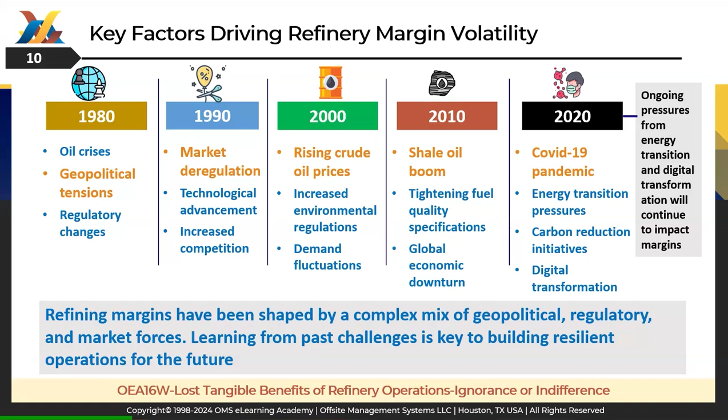So what can we do to improve profitability amid margin volatility? Refineries can focus on operational efficiency—they can leverage advanced control systems to optimize production, implement predictive maintenance to reduce downtime and equipment failure, and focus on energy efficiency improvements to lower operating costs.

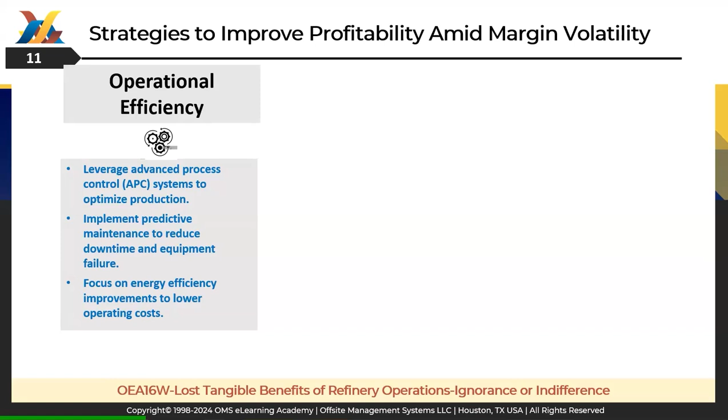Second, refineries can pursue digital transformation and AI. We're seeing a lot of these initiatives in the industry—not just refining but all industries—utilizing AI and machine learning models for real-time data analytics and decision making, adopting digital twins for process optimization and forecasting, and implementing data-driven optimization in blending operations. I'll touch on some of these AI and machine learning ideas in this webinar.

Then we have initiatives for net zero and carbon reduction. We hear much about the Paris Agreement and other things. Refineries down the road have to meet these carbon reduction initiatives to satisfy new regulatory demands, and optimize fuel quality specifications to meet environmental standards, and focus on energy transition to adapt to future market shifts. These are the 3 areas—some is being done now, and some can be done in the coming decade. Implementing this strategy can help refineries convert gross margin into sustainable net profit, even in volatile markets.

So what are the two areas of the refinery that are really impacted by this? We all know on-site operations—that's where all the process units create and manufacture components and products. These products aren't sold by themselves; we're talking about things like the distillation column, FCC, isomerization units, and so on. But they create components which go to the off-site operation to create the final product, like fuel, gasoline, diesel, fuel oil, LPG—those are the products sold in the market.

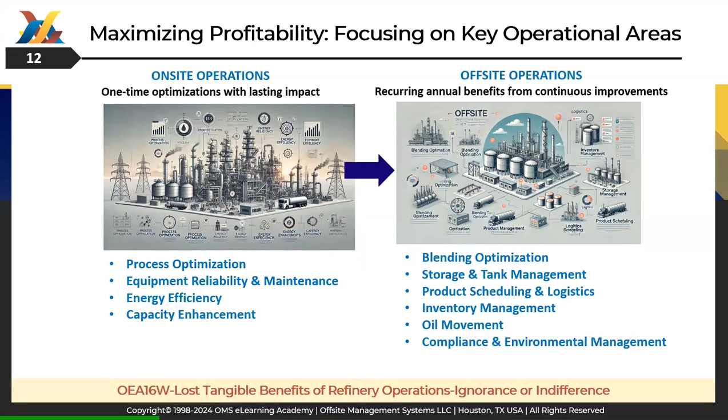And that's where the refinery makes money or loses money. Those areas include blending optimization, storage and tank management, product scheduling, logistics, inventory management, oil movement, and compliance and environmental management. Unfortunately, the off-site area is ignored by many refineries because it's not considered very important—they focus more on on-site. We'll discuss more on this topic, on where the money really lies.

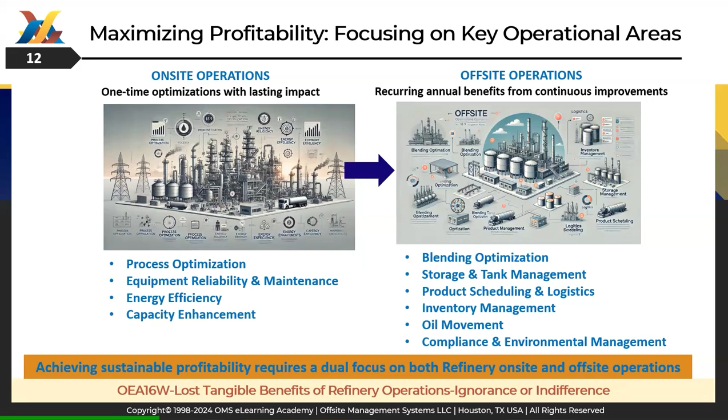So achieving sustainable profitability requires a dual focus on both refinery on-site and off-site operations. There's a belief that we can make more money on on-site operations than off-site. Let's wait a couple of slides on that one. So where does refinery profit really come from?

Let's understand the lost reasons for lost benefits in refinery operation. We have 5 factors: data and measurement inaccuracies at 10%, scheduling and operational delays, equipment failure - but these are not due to any ignorance factor. Ignorance factor, which is lack of awareness and training, is 30%, and indifference, resistance to change, is 25%.

To address this, refineries need to invest in training to reduce loss, because unless employees and professionals are trained, they cannot be skilled or aware of what they're losing for the refinery. Then indifference comes from the culture of continuous improvement, and this focuses more on management, who have to recognize and accept changes. We'll go into more detail in this slide.

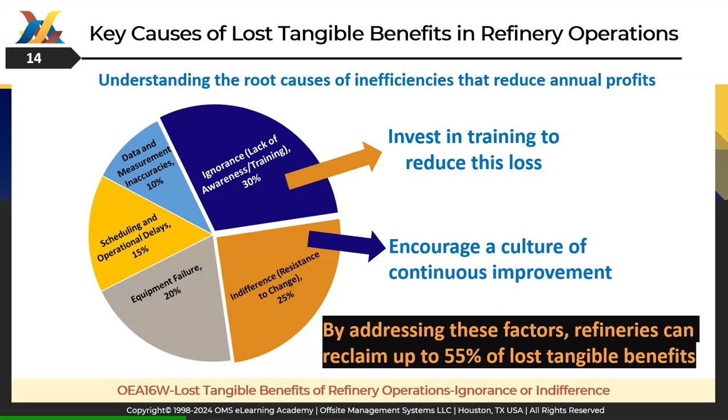People ask me, what is the ignorance factor in operations? Ignorance factor is lack of awareness and having outdated knowledge - these are the two major reasons. Failure to recognize impact, culture, complacency, limited exposure, absence of data-driven approaches are also important but have less impact.

The reasons for this: outdated training and skill development, organizational silos - there are too many departments which never talk to each other, they don't know what the left hand is doing with the right hand. Resistance to change - I hear again and again, 'if it's not broken, don't fix it.' Lack of management focus on off-site operations, lack of access to modern technologies, inadequate data analysis capabilities, and evolving industry standards and compliance regulations.

On this point, I had presented a paper in Delhi on 9th September, with about 600 people from the industry. My interaction with them was the same thing: why are refineries ignoring the benefits and why are they indifferent? They had some insight and some reasons, and those reasons are put together in this webinar to give you first-hand information on why this happens.

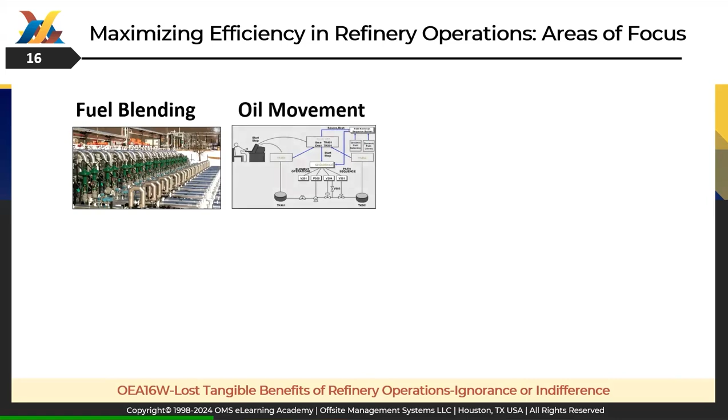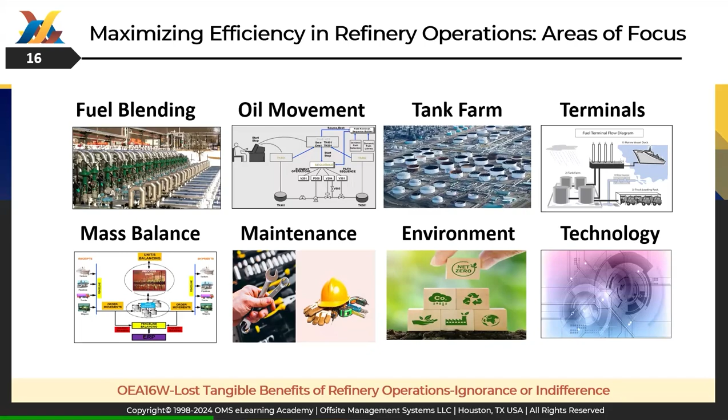So what are the areas of focus for increasing efficiency in refinery operations? We start with fuel blending, which everybody knows brings about 50 to 55% of the products in the end. Then oil movement, tank farm, terminals, mass balance - sometimes called oil loss - maintenance cost, environment, and technology. All of these 8 areas have their own importance in terms of how much money they bring to the table as tangible benefit, and we'll go into detail one by one. Let's start with fuel blending.

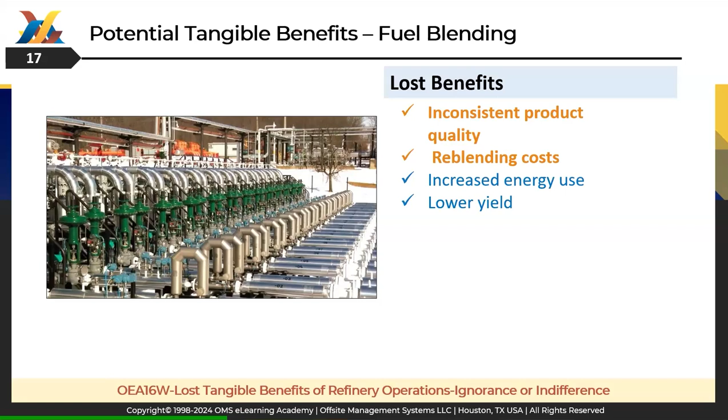I've talked about this concept over many webinars, but we'll keep it short here. What are we losing here? We're losing benefits in terms of product quality and reblending cost, increased energy use and lower yield. Inefficiency in terms of manual suboptimal recipes, inaccurate blending ratios, and outdated blending technology. The benefit is about $22 to $24 million, say $20 to $25 million per year.

Now, all these numbers I'm showing you on these slides, and in future slides, are not fake numbers. They have really been proven in the industry from OMS experience and from your own experience too.

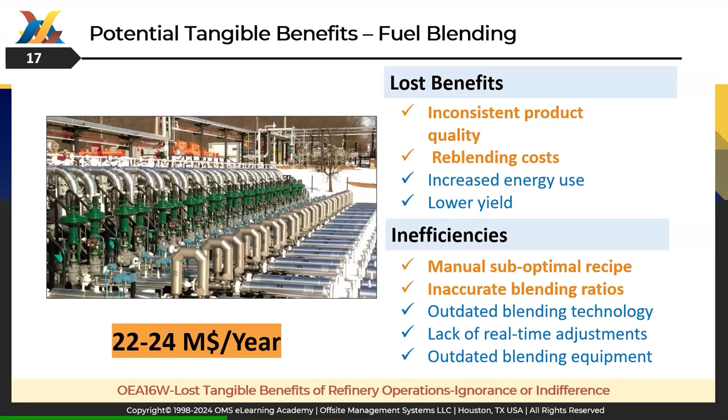Let's go to the next area, oil movement. In terms of oil movement, we are losing benefit in terms of product contamination and higher operational costs, inefficient infrastructure, and excessive energy consumption.

If you look at oil movement, there are lots of movements occurring every day - from tank to tank, tank to ship, ship to tank, whatever. It's about 12 to 13 types of different movements, and tank to tank is the highest number of transfers in a refinery. So for a 300,000 barrels per day refinery, about 100 to 200 movements take place in a day. Some are manual and some are automated in a modern refinery.

So there's a lot of inefficient routing and scheduling, underutilization of tank capacity because of fear of spills, and contamination from product mixing. When these products are contaminated, they go to slop - it's about $3 to $10 million per year. I need to point out that a lot of refineries take the blending upgrades and the oil movement upgrades separately.

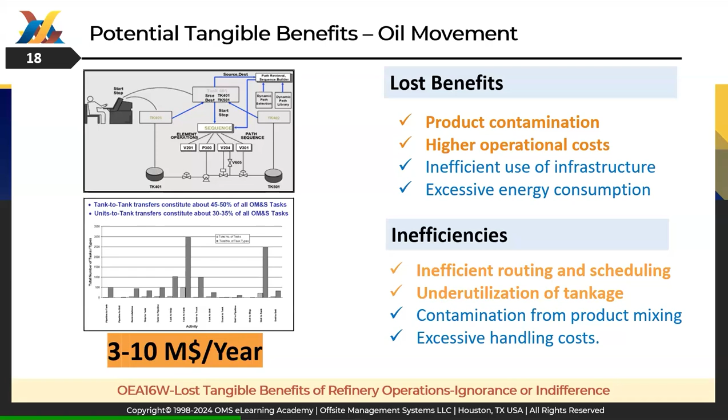OMS has done many studies of oil movement, and at the end of the day, we find that oil movement does not have enough incentive, even at $3 to $10 million, because it's done separately. The refineries which execute blending and oil movement together achieve the maximum ROI. But that concept is lost, and they don't realize it. They cut corners by doing blending first and then oil movement, and they lose the ROI for oil movement.

Let's go to tank farm management. Now we lose the benefits in terms of increased energy costs, product degradation, higher emission, and safety risk. Emission comes only when you are loading the tanks, and the vapor at the top of the tank liquid is lost to the atmosphere, and there are regulations on how much you can do. So they have to control that and minimize the loading and unloading. There's inefficiency from spills during loading time. If it's not automated, it spills, and then it causes a lot of difficulties in cleaning up.

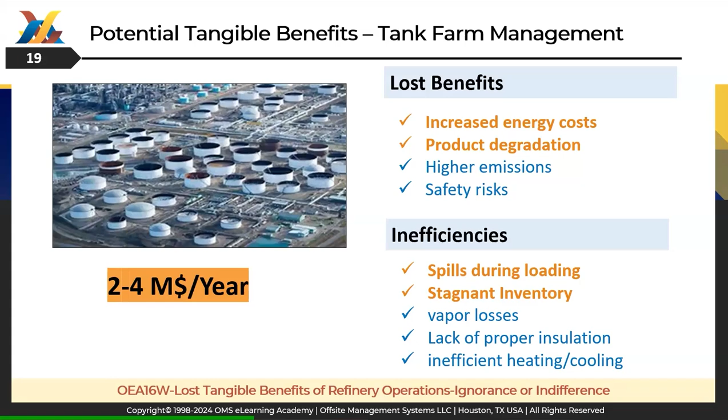Now, stagnant inventory - inventory is a liquid asset, about $3 billion staying in the tanks. It's like money in your bank. If you don't move it, you don't get much interest. So you have to move it, invest it somewhere else. That's exactly the same concept in a refinery. If you don't move the inventory either to customers or into a product, then you're really losing money. Every day you hold it in the tank, you're losing money - about $2 to $4 million per year - in terms of vapor losses, lack of proper insulation, and inefficient heating and cooling.

Let's go to terminal operation. Terminal operations are like ship, truck, barges, and other things. If the ship is delayed and waiting at the port, they have to pay demurrage charges, and the ship gets delayed because it might have to go to another customer. So there are also lost opportunities - if you don't sell product to the customer, you're losing opportunity in time, plus compliance fees and fines.

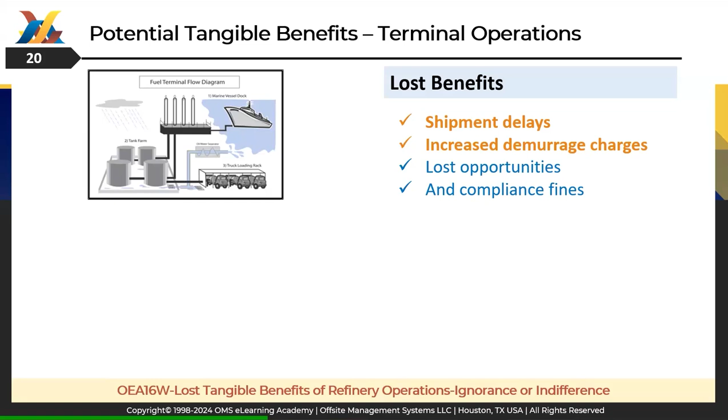In terms of inefficiency, poor scheduling - if the ships are not scheduled properly based on what is in the tank or what is required, then you pay demurrage charges. Inaccurate product measurement, which is called custody transfer - if you don't have the right meter calibrated or installed, it causes a legal dispute, because somebody says I gave you so much, and the refinery says no, I did not receive that much, because the meters were faulty. It can lose anywhere between $1 to $3 million per year.

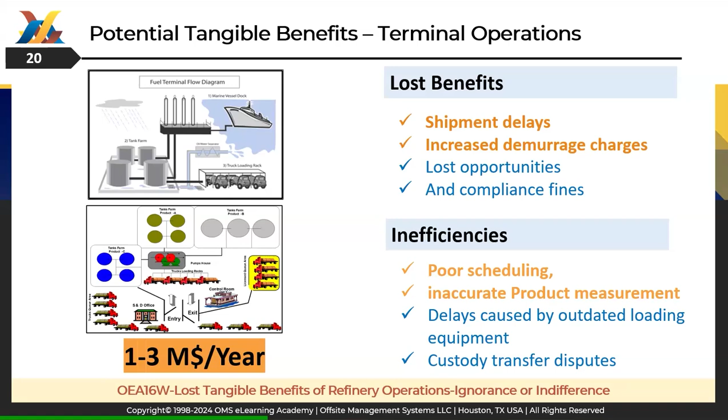Let's go to mass reconciliation now, which is also called oil loss. Oil loss is measured from inlet to outlet - it means what you received at the inlet side in terms of crude and product, and what products you are manufacturing and selling to the customer. I have seen many refineries do this balance. This balance is done by mass balance, which is called mass reconciliation, because products are not lost between input and output - they have to be conserved.

Now, I've seen data from refineries showing a negative loss. It means the mass is gained, which is not correct. And it's not correct because of data reconciliation issues. So it's an inefficiency due to manual data entry errors with delays in reconciliation. They don't do it every day - they do it every month, because a lot of work is involved. Many companies have tried creating million-dollar projects where they want to do it every day, and they failed. Unfortunately, I was part of those kinds of projects.

So I've shown here the lower graph that if we take a 0.01% improvement in oil loss - the typical average oil loss is about 0.4 to 0.5%, which is a good average - if you decrease from 0.5 to 0.49, you gain millions of dollars in terms of oil loss.

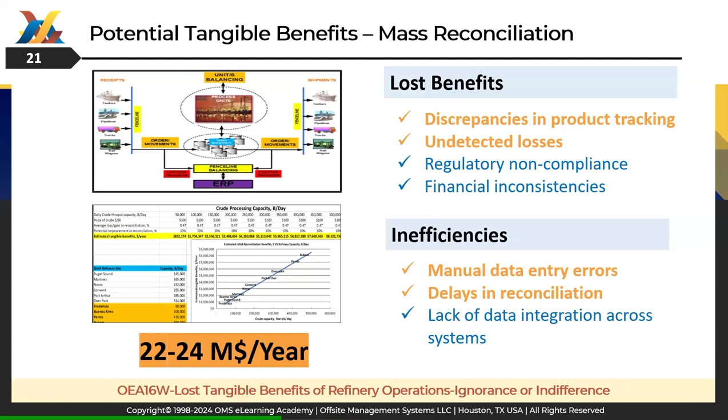We go next to maintenance and equipment health. Equipment has to be maintained properly. I've seen the failure of pumps and valves in the blending, and then everything stops and the products are not dispatched to the customer. So you have reduced equipment lifespan, unplanned downtime, and higher operation cost.

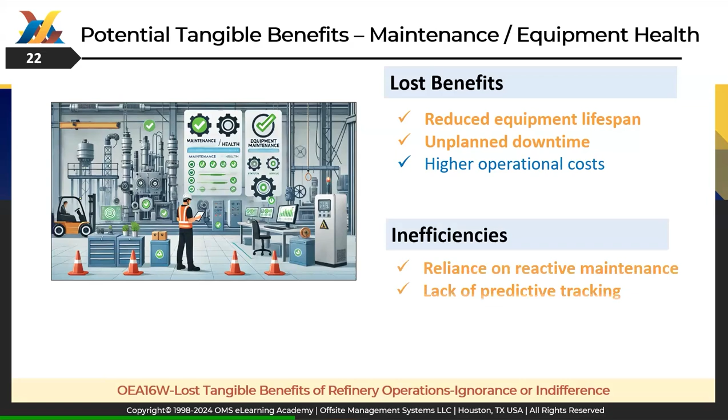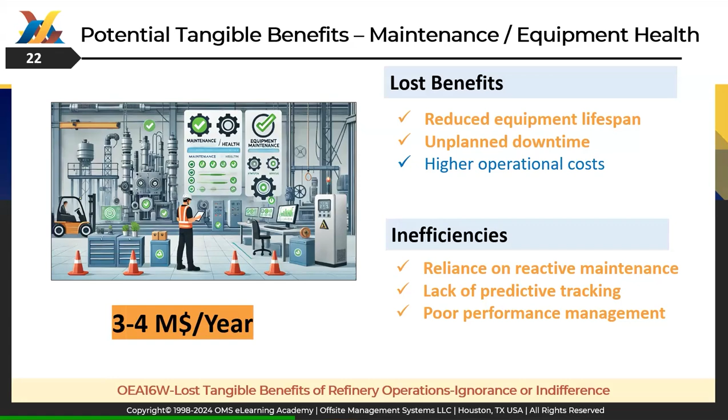Inefficiency, you're relying on reactive maintenance. You fix it only when it's broken. But if you don't do preventive maintenance, then you're asking for disaster, and you're losing opportunity. It's about $3 to $4 million per year.

Then we go to environmental compliance, which is becoming a big thing nowadays because of zero nets and carbon reduction initiatives. We've seen so many agreements now, and the loss comes in terms of fines, because if you are emitting a lot of hydrocarbons, you will be fined. So refineries are losing money from that point of view, and it also damages the reputation of the refinery. Inefficiency, inadequate emission control, lack of real-time monitoring, inconsistent adherence to regulatory standards — it's about $1 to $8 million per year estimate.

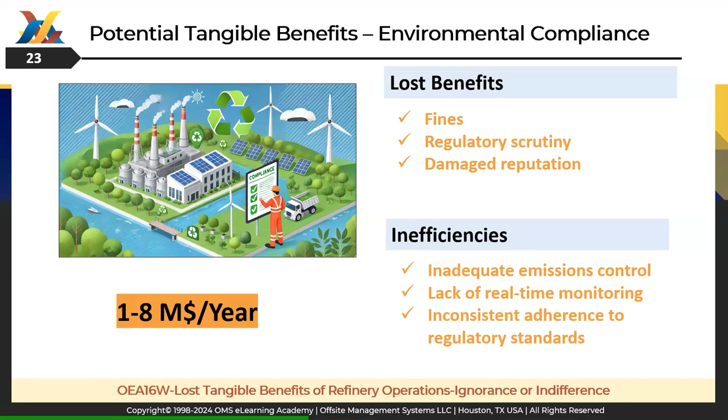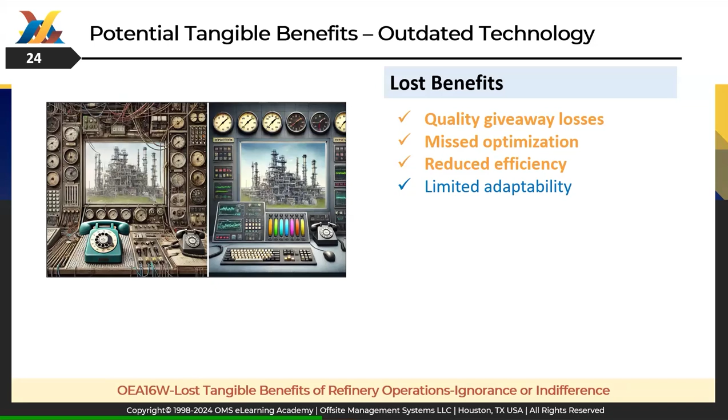Then we come to outdated technology. In terms of quality giveaway losses, missed optimization, reduced efficiency, limited adaptability. Now, if the refinery doesn't adapt to the latest technology, which is moving at a very great rate, they are left behind in terms of those tangible estimates. So it's all manual processes, outdated equipment, higher operational costs, missed opportunities, insufficient real-time monitoring, and it's about $7 to $20 million per year. Now, these depend upon what stage your blending system or the other systems are at — you might have to do a partial upgrade or a total upgrade. That's why the range is between $7 and $20 million per year.

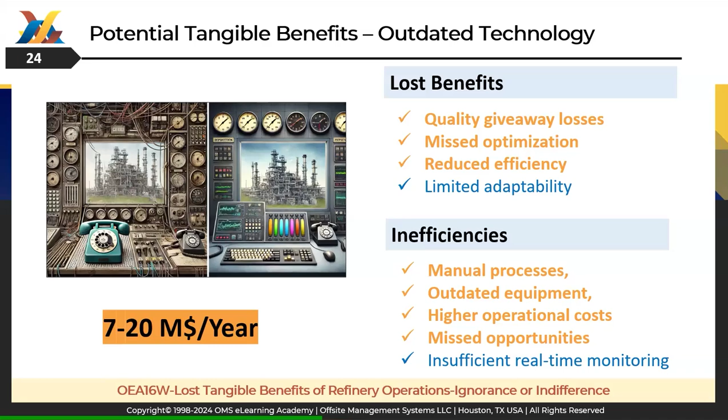So, okay, we've talked about where we're losing the money. Fine. How do we know those benefits, those numbers that I've shown you? How do we analyze them? Let's talk about them one by one.

If we take blending efficiency, how do we estimate this? There are three methods we'll talk about. First, refineries do a quality giveaway analysis. They look at the quality of the final blend, know the spec, look at historical data, and calculate the giveaway. That giveaway is about $10 to $15 million for a badly run refinery.

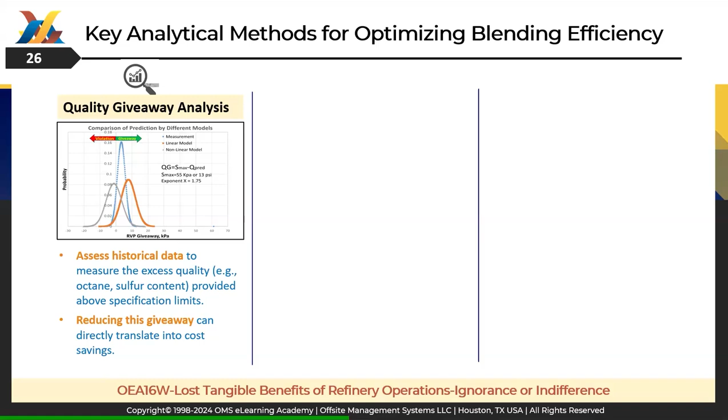The second method is blend reoptimization. If they don't have optimization in the refinery, the second method is to take historical data and re-optimize the blends to see what they could have achieved in terms of optimal recipe and minimum giveaway — re-optimizing the past blend. This is the typical method, and the refinery or person doing this uses a non-linear optimizer model, which is very up-to-date technology.

The third method is benchmarking. Some refineries say, okay, what you're saying is fine, but how do we know where we are? Are we good, bad, or the best? Some refineries I've heard say they are the best — I say, okay, let's do the benchmarking. This technology was developed by OMS, where we take the blending system and thoroughly examine every aspect of it, infrastructure as well as efficiency. We develop two indices: infrastructure effectiveness and operational efficiency. With this, we can compare two refineries, or any refinery, across each other worldwide or within the same corporation. So that's the third method to know how much money you're losing, and where you are in the industry — at par, below average, or above average.

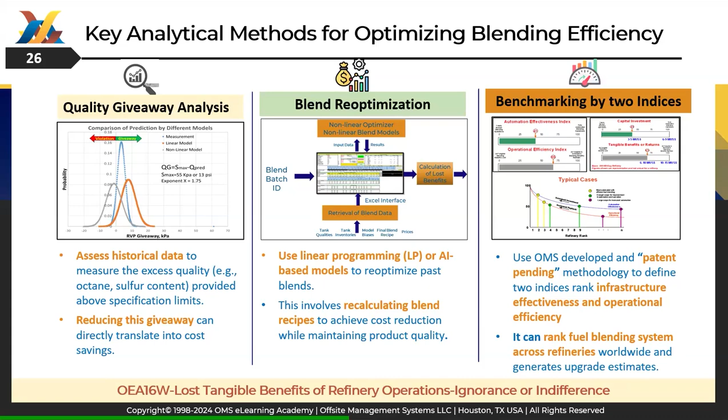And then we use the data to optimize the transfer frequencies. Instead of doing transfers from one tank to another, we can use different tanks, so that comes out of that analysis.

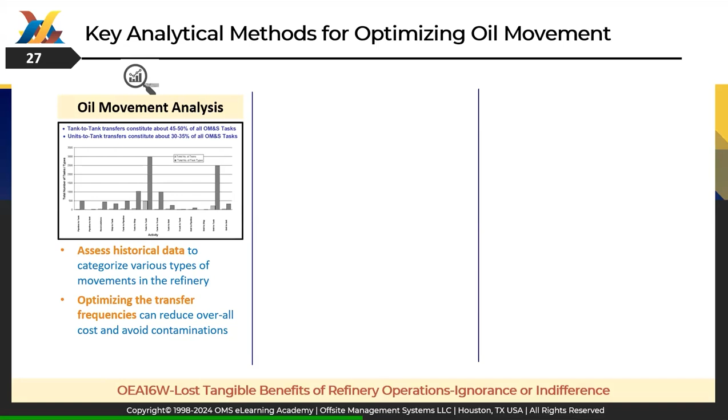The second analysis is that sometimes it's difficult to really put a figure on it, how much money we're losing and what impact it has. So we put four factors in there: manpower, automation, HSE, and tangible benefits, and we give different weighting factors to them. With that, we're able to come up with an average number, or within about 90% accuracy, for each area.

And this study also gives a very good idea to the refineries: how much money are we losing in oil movement, and is the ROI something we can justify to automate the oil movement system?

Sometimes it works, sometimes it doesn't, because they didn't do it with the blending, so the project sometimes fails or doesn't go at all. So the third method is benefits by activities, using the key impact factors I talked about in the second method. Different transfer types emphasize that the oil movement and blending project should be executed together for maximum ROI. So implementing these three strategies for oil movement, you can achieve efficiency and also reduction in cost.

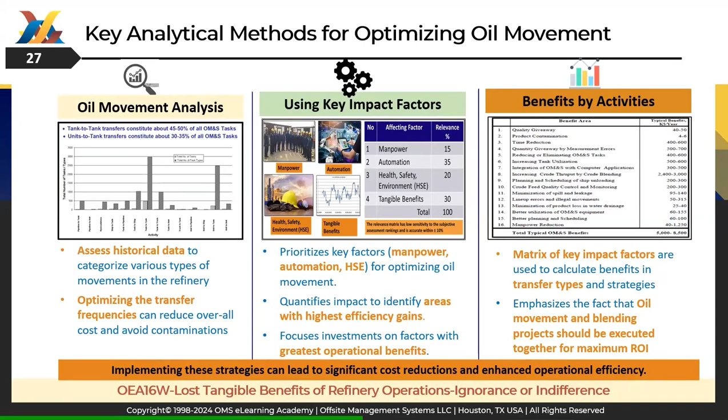Now let's talk about tank farm optimization. Almost every refinery nowadays has an inventory management system, meaning they have a tank gauging system, and that tank gauging system gives inventory.

Now, when we look at it, we also look at the historical data: are we using the maximum storage in the tank, or are we stopping at 80% because we're afraid of spills? That kind of analysis gives us the picture of how we're managing inventory in the tank. It also gives analysis on whether the number of tanks is sufficient in the refinery.

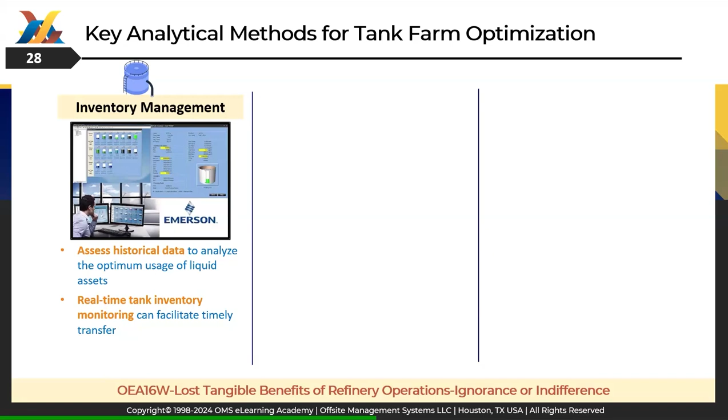Sometimes you cannot create or install new tanks, it's too late. But what we have in the refinery can be optimized. So that analysis comes out of inventory management historical data.

Secondly, minimizing tank analysis. This is a topic which is very critical in terms of blending. Now, typically, what happens is the lab sample is taken from the tanks, it goes to the lab, there's a time period, and then they put it in the system.

Now, when the blending starts, that quality may already be outdated by half an hour, 4 hours, 3 hours, 6 hours, or even a day. And when you blend and do the optimization, you're optimizing on the old quality, not the correct quality in the tank. So this is the factor, and there are many methods refineries can use to minimize and make accurate the tank analysis for processes like blending, especially blending.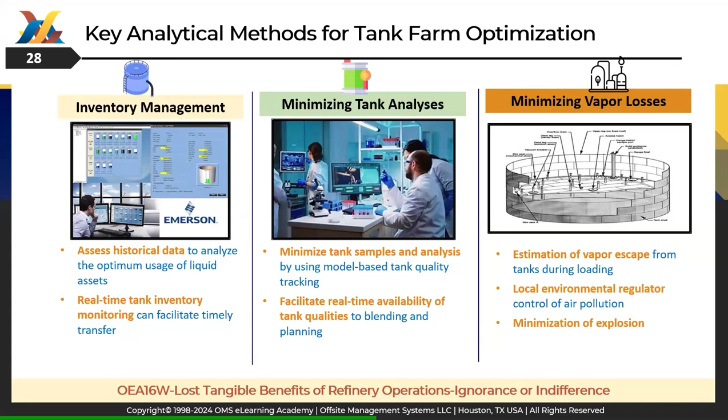Then the third method is minimizing vapor loss, and that requires considering how often you load the tanks and how you schedule them. Because every time you load the tank, vapors are lost in the atmosphere, and you have to measure and estimate them and report to the authorities that you're not emitting vapors out of spec. So there are regulations, and you also have to minimize explosion risk.

So those are the three areas of analysis. In terms of optimizing tank farms, it reduces cost, optimizes usage of liquid assets, enhances safety, and boosts efficiency. Let's go to the terminal operations.

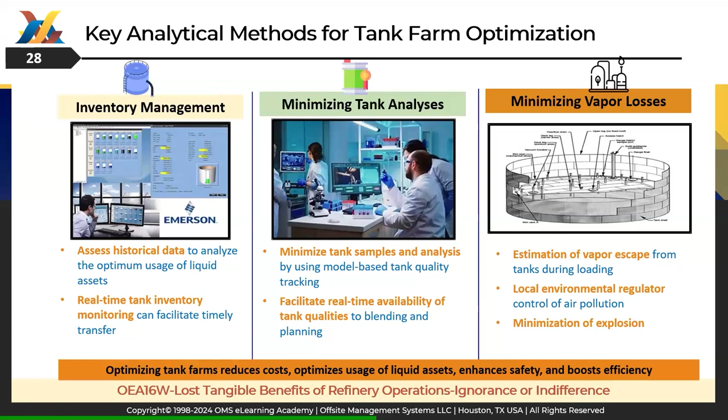Also, if you're getting the crude and making product but not delivering it to the customer in time, you're losing opportunity. So the cost of inefficient scheduling also plays a role.

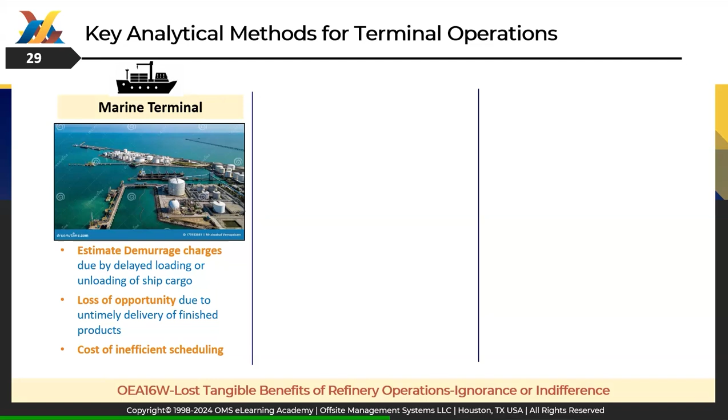Then we go to the truck terminal. Typically, if you see the truck terminal, there are about 300 trucks per day moving in and out, and sometimes the loading is automatic, or sometimes it's manual or semi-automatic.

If there's a manual process, then there's a problem of contamination or filling the tank not per the order, maybe a little less. Now, we might think that 0.1% less product really doesn't matter, but if you look at the cost of that, it's a lot of money. And the customer then says, okay, I ordered so much and I'm getting less.

So those kind of lawsuits and disputes also come into the picture. The cost of truck waiting times, how long the trucks have to move. They have to move because the faster the truck moves, the more money you make.

Estimate loss due to incorrect product loading. Reduce idle time by implementing an automatic scheduling system. Now, the volume of a truck terminal is huge. I'm talking about 300 to 400 trucks for a minimum 300,000 barrel refinery. So the scheduling and logistics have to be seamless.

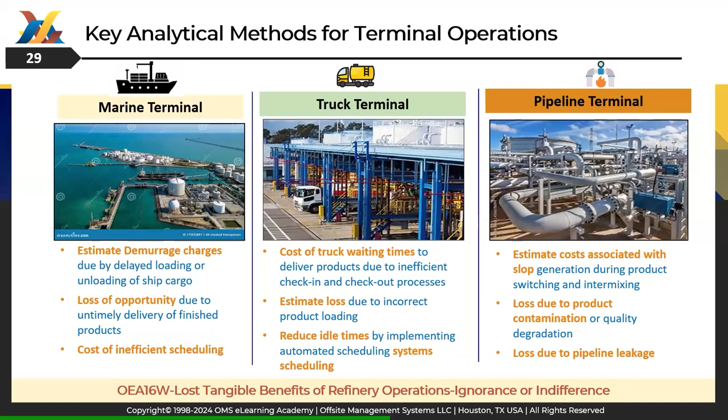Then comes the pipeline terminal. Now each of these terminal operations have their own challenges. In a pipeline terminal, the products are shipped one after another. Say, for example, if you are sending 92 octane in the pipeline to the customer, and after that there is another customer waiting for 87 octane, you have to make sure the 87 octane does not contaminate the 92 octane in the pipeline. And there is an area where they have to send it to slop because the mixing always happens, depending on the length of the pipeline and the order.

So typically a refinery has to schedule so they don't send the low grade octane product after the high grade, to minimize contamination. Sometimes they cannot help it, so then they have to take it out of the slop and reprocess it again. And sometimes there's leakage also. So all of these have their challenges, but they have methods of how to analyze them in terms of tangible losses.

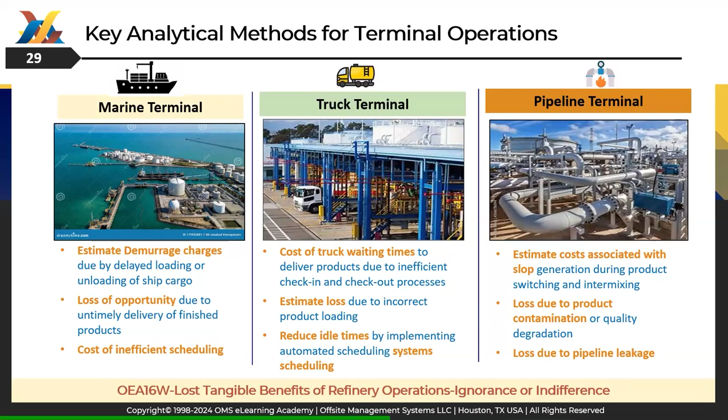Then we come to mass balancing, oil loss and so on. As I said before, the hydrocarbon balance starts end to end, starting from receiving the component or crude and sending the final product to customers. So they have to implement real-time tracking of material inflows and outflows from one end to another, mostly at the truck, the ship cargo, and the pipeline.

They receive the crude also by pipeline and they also receive it by ship. I worked for a refinery where there were about 11 to 12 types of crude coming by pipeline, and so they have to schedule which pipeline crude goes to which tank, if they're mixing or crude blending. They use an ERP system to automate data collection, to reduce balancing errors, reconcile discrepancies, and do the accounting losses.

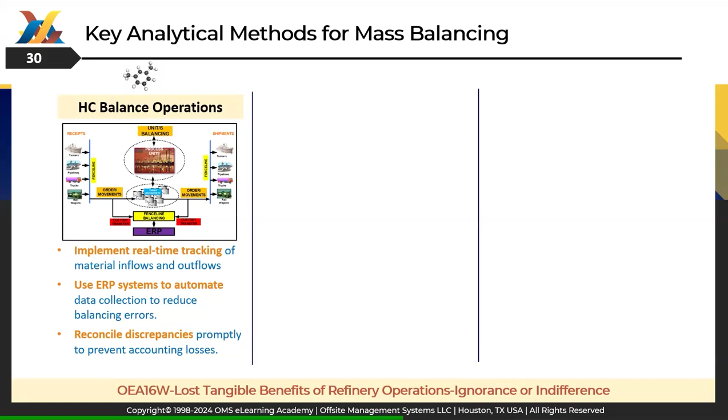Then we do an oil loss analysis. You can see all this oil loss in the flare, drainage, process, fugitives, tankage, flare pilots, and all those things - they all have to be analyzed. Now these are aggregated. Some do it every month, not every day. Every day has sort of become impossible nowadays.

So they do it every month, and there's a lot of activity from a lot of departments and a lot of people involved in this. But when you look at the oil loss, then you look at historical data, how much you're losing and what are the sources of oil loss. I did a study for a refinery, and I took 3 years of data for this analysis.

And believe it or not, they were showing the analysis as a loss or as a gain of mass. And that was because of errors in measuring, errors of calculating, errors of this sort of thing. So those kinds of things impact the profitability of the refinery.

So as I discussed before, if you reduce oil loss by 0.1 for, say, 10 refineries, you're talking about 20 to 40 million dollars, if not more, in terms of oil loss. And most of the oil losses are in measurements - how accurately you do the measurements. They are paper losses, not real losses.

But real losses also happen because of leaks and fugitive emissions and other things, and mismatch or balancing between tank to tank. So all three methods are applied for calculating a tangible benefit for mass balancing.

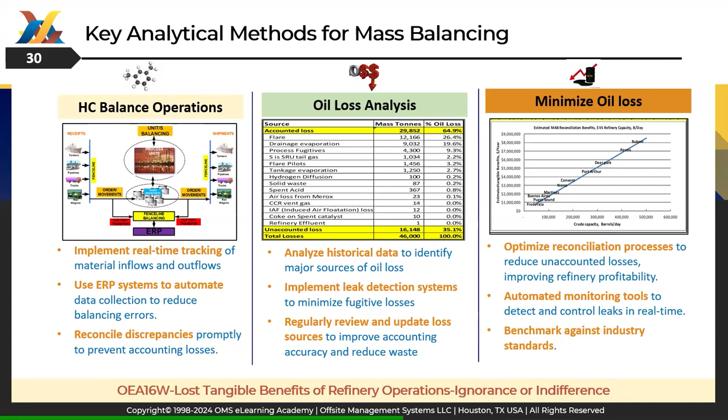Then we come to maintenance and equipment health. The predictive maintenance - why is it important? Let me give you an example.

In a blending system, to pump from one component, you require about 3 to 4 pumps, or sometimes at least one spare pump. In the system that OMS designed, each pump is recorded for how many hours it has worked, and when maintenance is required. That's called preventive maintenance. These kinds of things are very important. You don't want to start the blend and find the pump has failed because it wasn't maintained properly, or you don't have a spare pump.

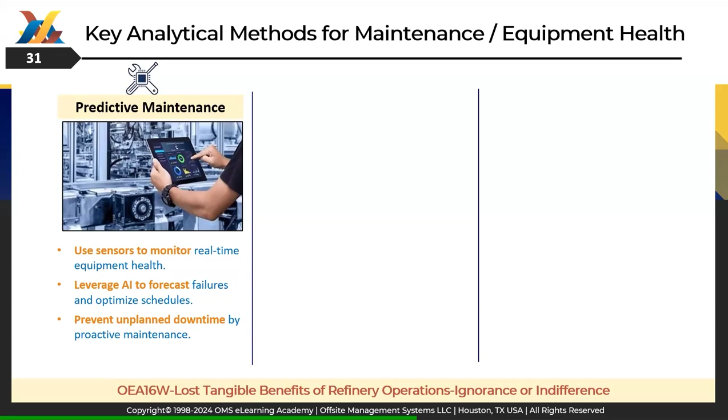I've seen all of it. Condition monitoring - some equipment is prone to failure because of vibration and thermal issues, so refinery maintenance departments do analysis and checks for those. These are regular or sometimes scheduled maintenance.

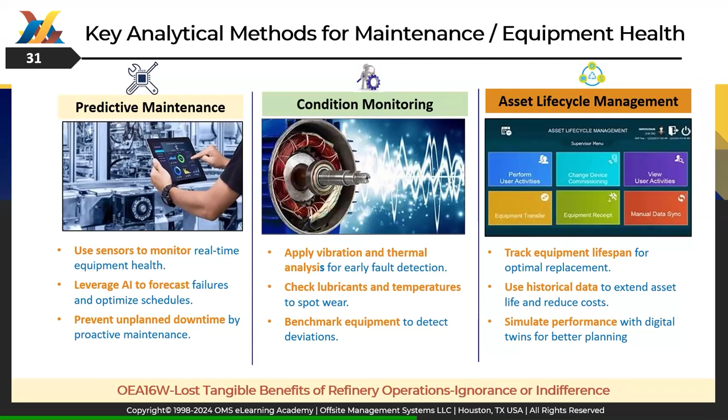Asset lifecycle management: you have to track equipment lifespan, how long you ought to use it, and replace it before the last minute. Use historical data to extend asset life and reduce costs. Simulate performance with digital twins for better planning.

Now let's come to the final slide on environmental compliance, in terms of how we estimate the benefits. For emission monitoring, nowadays everybody uses real-time sensors to track emission levels, using iPads and phones to monitor in the field. Automate reporting to meet regulatory standards and detect non-compliance early to avoid fines.

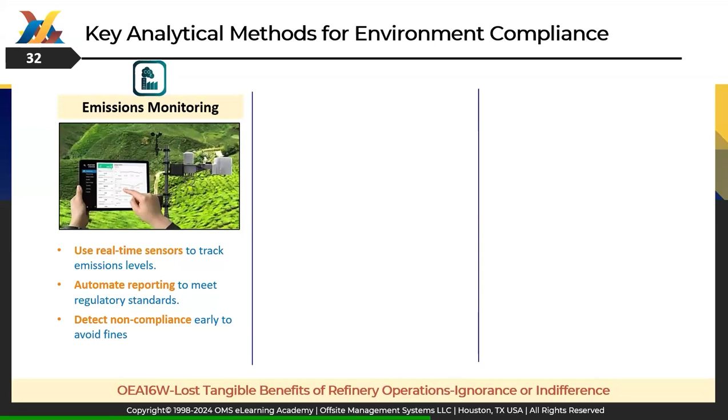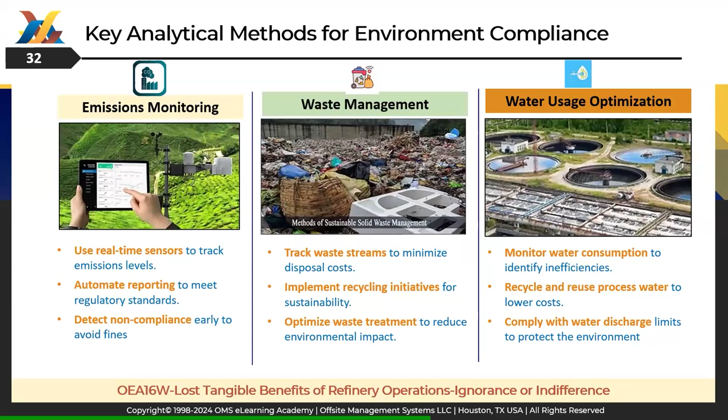So these are the 8 methods. We talked about 8 areas of benefits, how much they are, and then 8 areas where we can use different analytical methods to estimate those benefits.

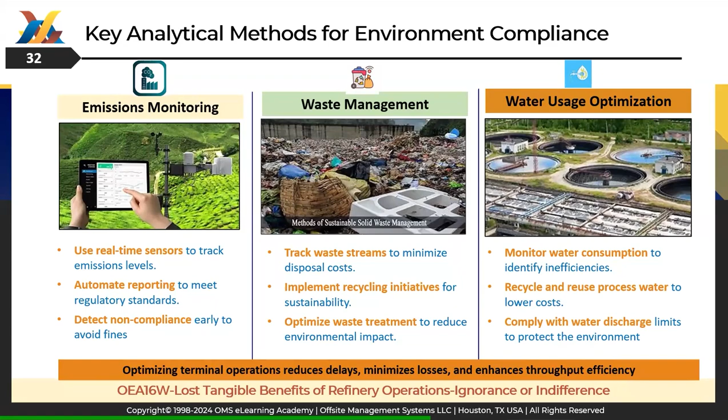So let me give you a summary. Sorry, for technology upgrade, I missed one.

In terms of technology upgrades, nowadays the buzzword is digital transformation. You see a lot of literature and talk about it. You have to use digital transformation to implement advanced data analytics, or to make decisions, because if you get information in real time, you can make decisions in real time.

Automate repeated processes to boost efficiency. You don't do the same thing again and again manually. Integrate IoT devices for real-time monitoring.

System integration - don't keep an island. Integrate systems together. Connect all the systems for blending, oil movement, truck terminals, and terminal operations - everything - and do away with legacy systems. If you have a legacy system, connect them in seamless operation. Implement ERP solutions to streamline workflows and centralize data management for improved access and security.

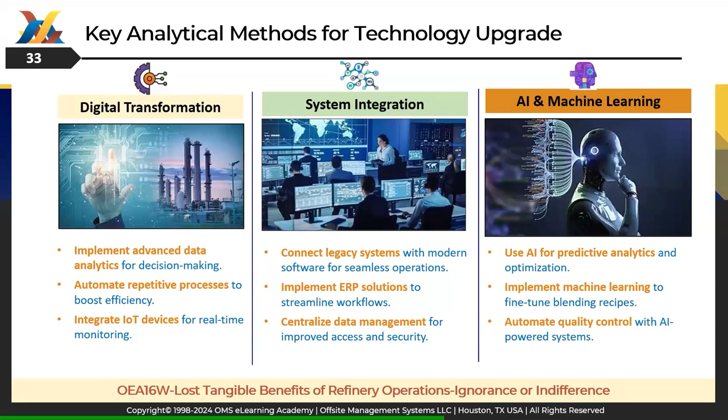Next is using artificial intelligence and machine learning. This has become a very hot topic nowadays, but also overemphasized. We think that AI can solve every problem - no, it cannot. It's like garbage in, garbage out. But if you use it very wisely, with focus on what you want to achieve, AI can certainly help you and increase your productivity.

In fact, OMS has developed a technique to use AI and ML for fuel blending without using analyzers, and we already have a patent pending on that. We have a project in the refinery to do a proof of concept. So AI and machine learning is not going to go away - it's going to become better and better. But we have to use it with due diligence and full knowledge of what it cannot do.

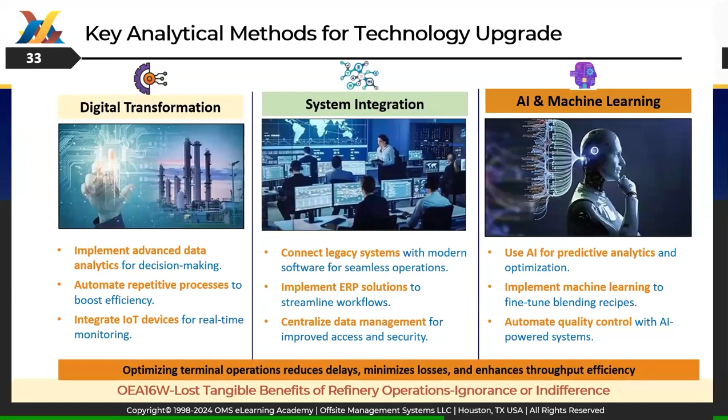So what have we learned so far? Refining the path forward. We talked about benefits, we talked about how to estimate them, and now let's talk about what we can do.

We have learned that refinery profit margins remain volatile with uncertain prospects for the next decade. It's not going to improve. It might worsen or it might be stable. So we have to recognize that.

Then we realize that the offsite operation, which is typically ignored or not considered important, has a potential of $40 to $80 million in a refinery of 300,000 barrels per day. That's there. It's your money to take.

Then we explored methods to leverage historical data, how to really estimate it. Because unless you know for sure how to estimate it, you won't be able to justify it.

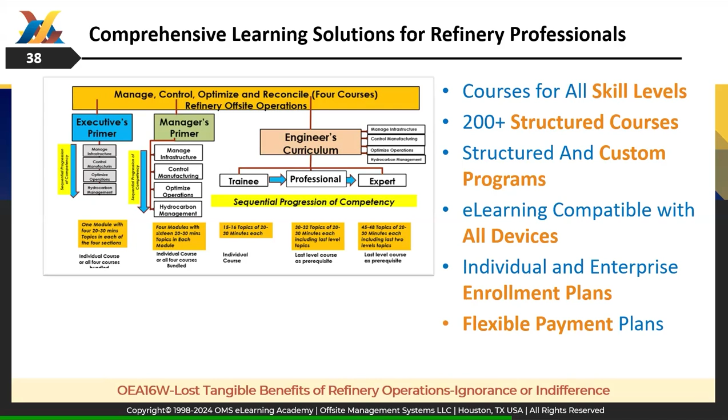So I will talk more about what we are doing in terms of upgrading the skills of the professional. Our platform, called OMS e-learning, offers 200 plus courses covering entire operations of offsite operations. We don't cover on-site operations. We have different layers, from executives to managers to engineers, and you can go for trainee, professional, expert. Those courses are very high end. You can take them on any device, anytime, resume and start, just like playing a movie on Netflix. You have user interaction, and you can build your own custom curriculum.

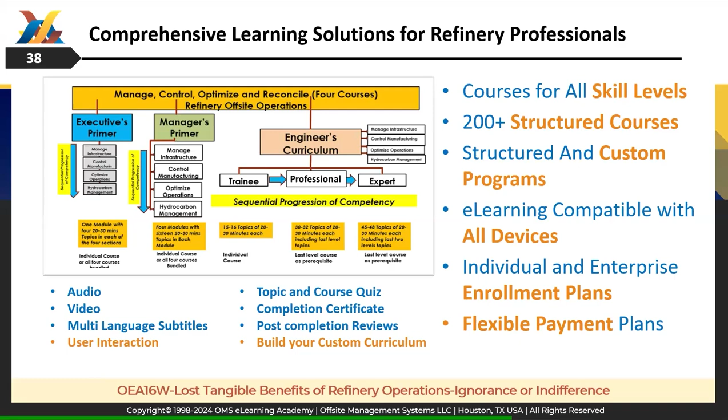So OMS e-learning is helping in that area to upgrade the skills of professionals in the industry. We have different methods of free learning. There are many courses you can learn by webinar, just like this one. You can take many topics and learn through free monthly courses, series, free tests, e-learning, and also hybrid live learning, where OMS teaches courses in public or hybrid online, with recordings plus live courses scheduled or in person. So we have different venues to help the industry professional upgrade their skills and contribute toward their own organization's profitability. But knowledge is powerful.

We also have a program where we give you trial access to the refining industry. We have a program where we can give you full access across the industry, across the academy, for 3 to 12 months. Your employees can take the certificates, take the course, and then the refinery industry can see how this kind of program is helping the professional learn new techniques and new skills and new knowledge.

We also are creating alliances with educational institutions. All you professionals listening to this webinar, we never learned operations of the refining industry in our college days. So if the student is in the final year of chemical engineering and they go to the job market for an oil industry, they don't know what the industry is about or what they do in the operation. So this is where we help the students in the final year and the fresh graduates to teach them, so that when they go out for a job, they have better knowledge and are well equipped. These are all free to the students and fresh graduates. The academy is fully open to them, any course, anytime they can take it. So this is our contribution to the industry as well as the institution.

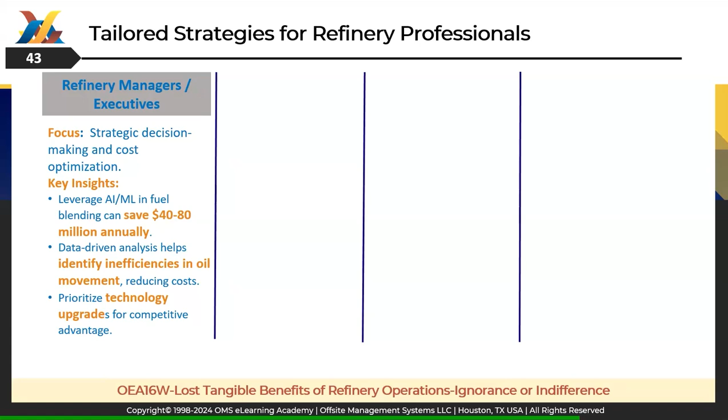As I said before, our academy focuses on refinery managers and executives, to teach them what is available in the education field in refining operations, and how they can benefit. These courses have a low number of topics and low number of hours, 4 to 8 hours, and they can learn a lot. By doing that, they gain knowledge about what they are losing.

The second layer is operations supervisors and managers. Sometimes they're also not aware of what they are losing. They utilize benchmarking tools, real-time data analysis, and embrace digital tools. Then come the engineers and technical specialists, who really understand there's a lot of tangible benefits and are aware of the methods, but their hands are tied because two layers up, they don't really appreciate what is being lost. Then HSE, health, safety, environment officers - this is also important because they have to work on optimizing vapor loss, implementing real-time monitoring, and ensuring safety through technology-driven process control.

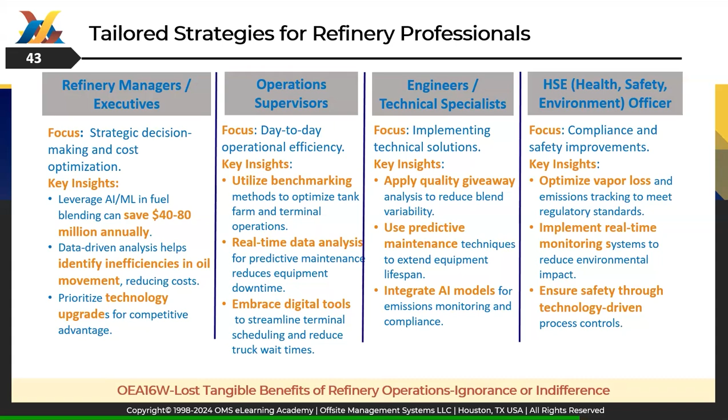All these numbers that I've mentioned in these webinars come from OMS's about 30 to 40 years of experience in the industry. We have proven these numbers and calculated them from real historical data. These are real numbers you can use to benefit your industry.

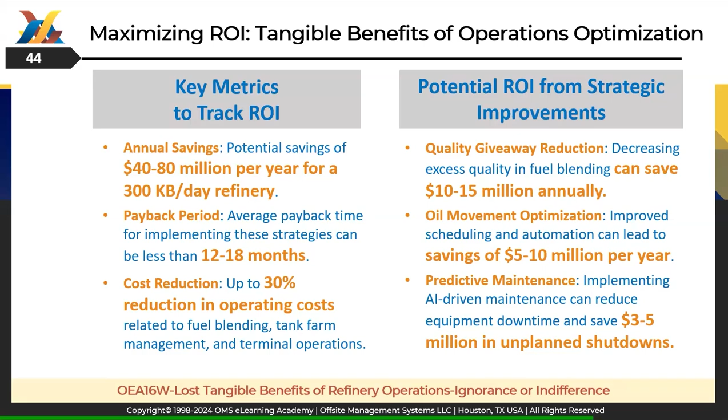So the one question that comes is: is there any tool to estimate this benefit? Yes, we have created an Excel-based OMS calculator, which already exists for fuel blending, oil movement, mass balance accuracy, and blending system benchmarking. We are expanding this tool to create a centralized dashboard with automated data input, cloud-based, where you can estimate the benefits for your refinery from all the areas based on your refinery input and different types of input.

So the benefit of this tool is you can get benefits calculated very easily rather than spending $100,000 on a consultant to do just one area of the benefit analysis.

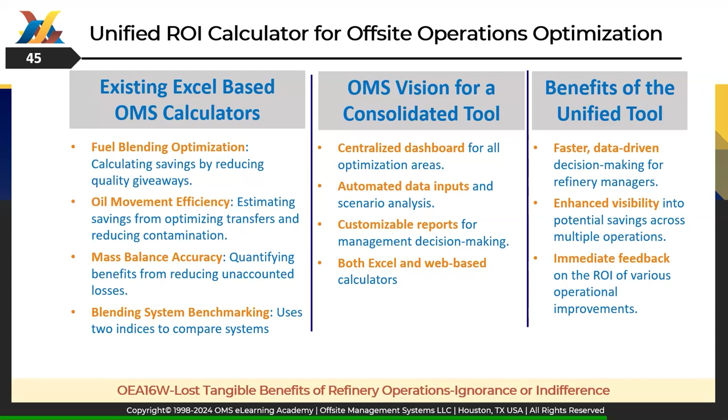So towards the end, if you like what I presented and want to know more, just schedule a free consultation with me. We can talk about any problem in your refinery and suggest a solution. You can take courses on our academy, which are free courses. You can see the feel, the quality, audio, video, subtitles, and take the webinars. Then you can download our resources — we have white papers, ebooks, and other things.